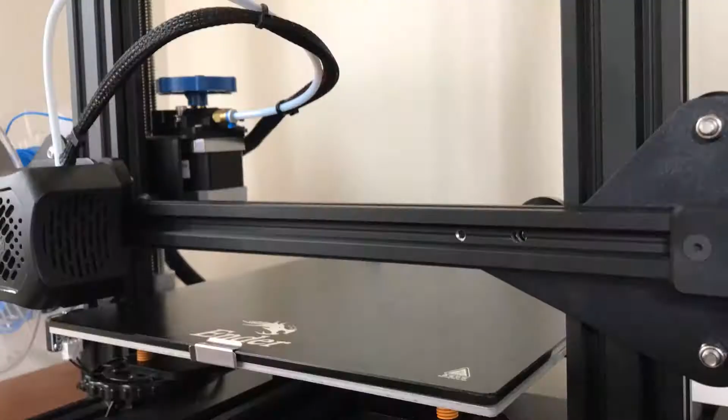Oh man, it happened again. This is why I need to finish that organiser, because I'm getting sick of all this stuff sitting on my bench. And that's when it happened - I bought a 3D printer and I fell down a big rabbit hole.

It only took me a week to get up to speed with the Creality 3D printer. This thing is fantastic. But I ended up playing with it for another 4 weeks, so that's why it's taken so long since the last video. And then I hit a snag.

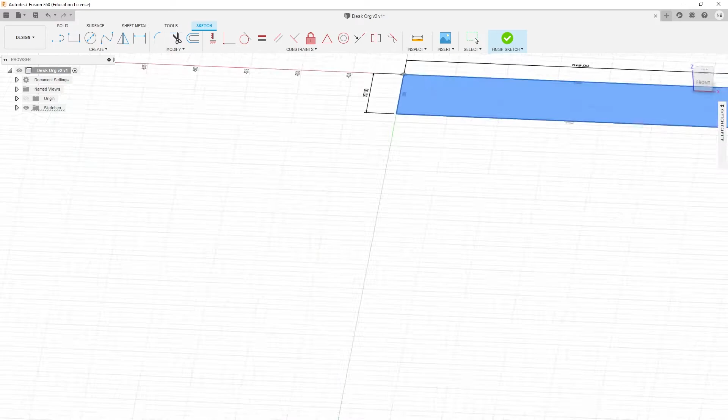Back to the drawing board. I didn't realise it when I ordered the plywood - 6.5mm comes out a bit more like 6.9mm, so we need to call that 7 for the purposes of the design. So I have to go back, start from scratch.

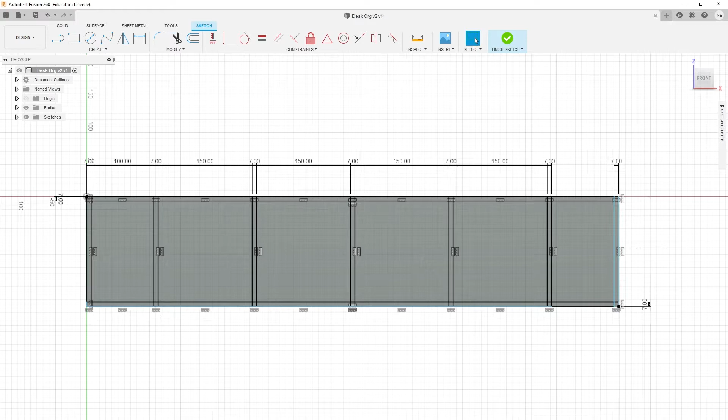The other change is that I want to 3D print the drawers now. I don't have to make them with the laser. That puts some constraints on the size of the drawers that I can 3D print. So this is the point that I ditched the idea for the cutouts on the back of the organiser that clear the desk mounts for my monitor arms, and I just run with a 200mm depth for the drawers.

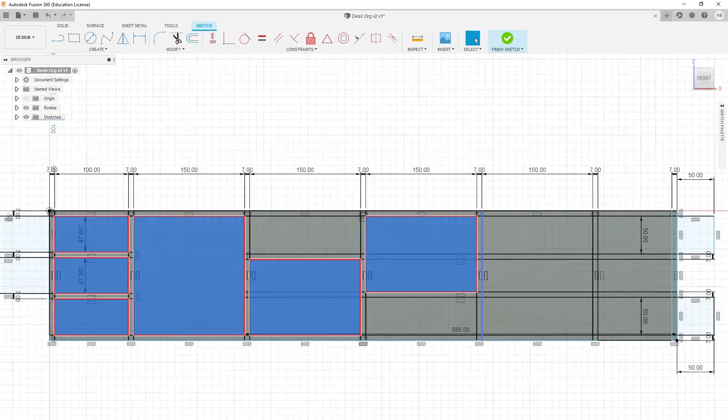It took me a little while to work out how I wanted to lay this one out, and obviously I had to go backwards and forwards with a bit of maths. I wanted something that was a bit more pleasing to the eye and not just a whole heap of same size drawers, so I made one very deep drawer, 3 offset up-down drawers, a pencil holder which will remain on one end, and then 3 equal size drawers which will be on the left hand side.

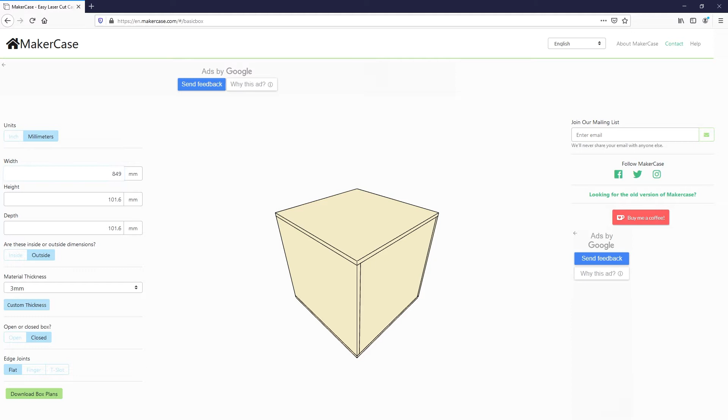If you're a laser user, a handy tool online that you can use to get a jump start in laying out boxes is MakerCase. I've left a link in the description so you can jump over to MakerCase to have a look for yourself.

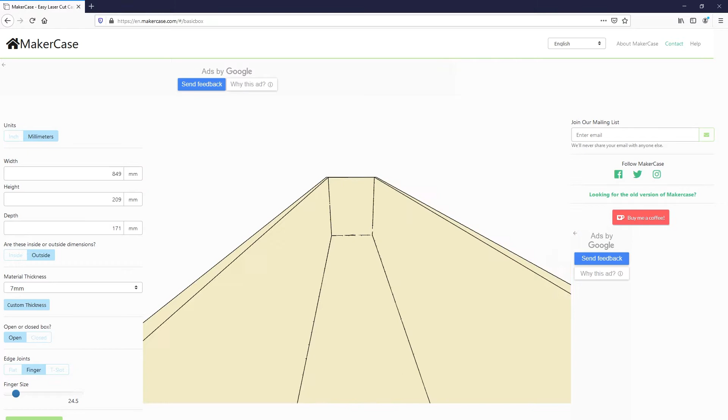We can define a custom material thickness, which is handy in our case seeing as we have 7mm ply that we're working with. You can set your dimensions, and it'll also let you do an open box, which is handy because we're not going to have a front on this one. And here I'm setting the finger size, 24.5mm, or about an inch.

MakerCase allows you to export these files as a .svg, which is handy for me because I use Corel, and Corel works with that very easily.

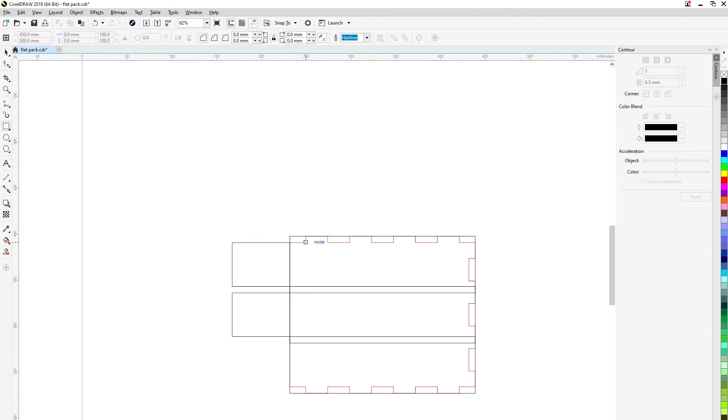I'm not going to talk a lot for this next bit because it's mainly me mucking around in Corel making sure that I'm getting my layout correct. I've sped up this next section by 10 times, mainly so I don't bore you. Some people might be interested in that and I might post that footage later.

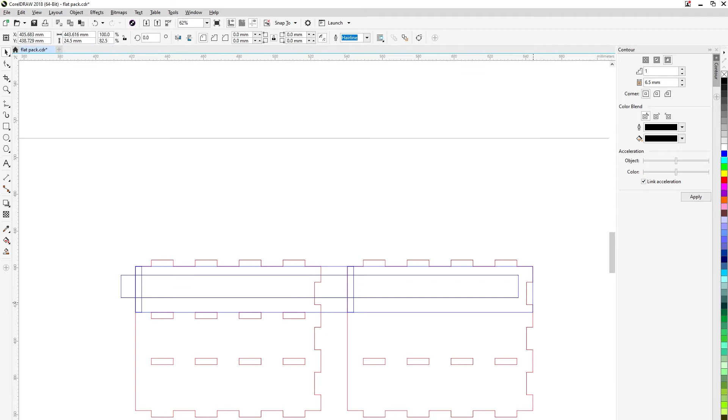Might seem a bit hard, but all I'm doing here is taking a template that MakerCase has created for me and using that to design the rest of the dividers and drawer inserts. Don't let this overwhelm you, it's easier than it looks, and if I can do it, anybody can.

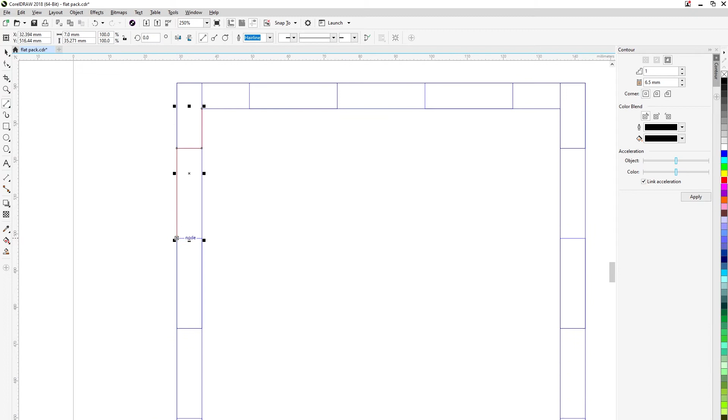Honestly, this is the hardest part of owning a laser, coming up with the files. If you've got nothing to cut, you can't run the laser.

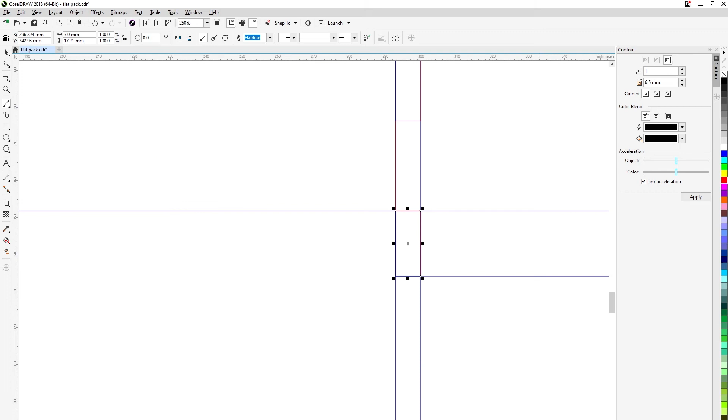This video shows about 2 hours worth of backwards and forwards in Corel, getting that design in place. I did have to go back and touch up a few things because I made a few mistakes, more like assumptions. Let me know in the comments if you can see what I did wrong.

It's amazing how many people buy a laser but don't have the skills yet to run one. That means they're usually stuck using pre-made designs, which is never ideal.

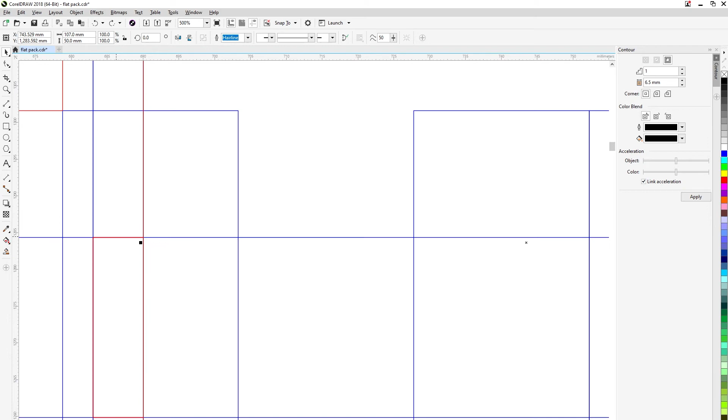I decided that before I bought this 3D printer, I was going to learn how to design in 3D first, and I deliberately didn't buy the machine until I knew how to make things in 3D. A laser and a 3D printer complement each other perfectly.

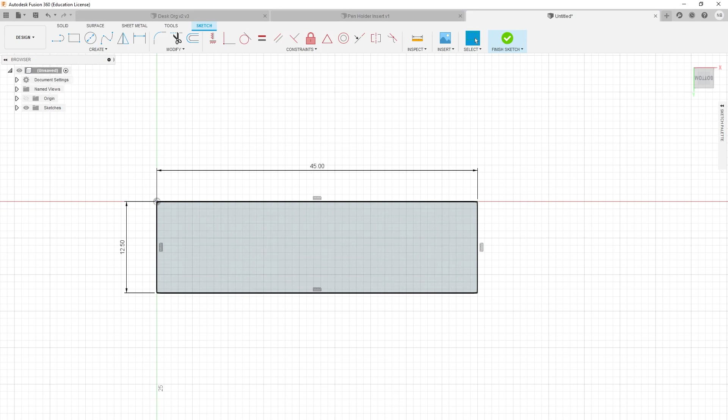In the next video I design the knobs for the drawer inserts and we get cutting. Yeah baby, laser time. The good news is by the time you've seen this video I'll have already started cutting and filming the next portion of this video, so you won't have to wait around for as long this time. It won't be 4 weeks.